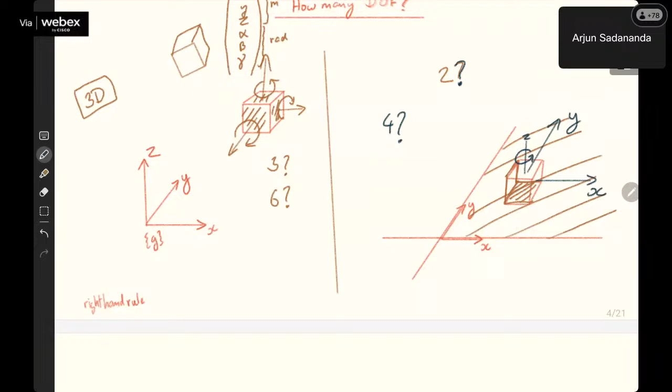So you can rotate in the Z axis, right? You can rotate in the z-axis - you can't move along the z-axis, but you can rotate this body along the z-axis. That is possible without leaving the surface. So it has only three: you can't translate in the z-axis, this is not possible, but you can rotate about the z-axis. You can't rotate about the x-axis either, because then the body would have to leave the surface - this surface contact would be gone. You can't do that in the y-axis either, but you can do that in the z-axis without leaving the surface.

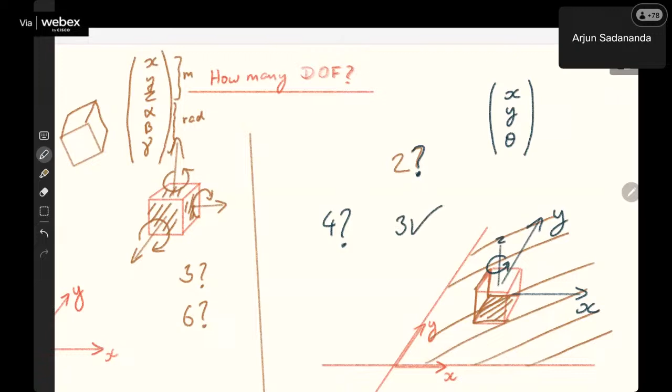So how many variables do I need to uniquely define the position of this object? I need an x and a y and a theta - three variables, right? So given these three variables, I can uniquely tell the position of this object in the two-dimensional plane.

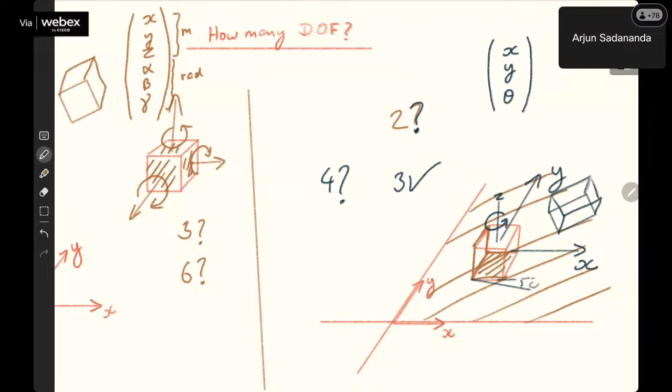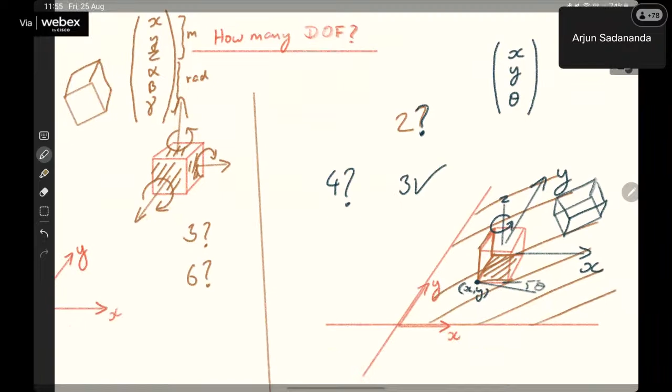For example, I can define it like this - it's not exactly tilted, but I'll force it to be a little tilted. Theta is the amount of tilt, and x and y is the exact position of this corner. So x and y is the position of this corner of the cube, and theta is the angle between this edge and the zero, which is basically the x-axis. I just translate the x-axis and the angle.

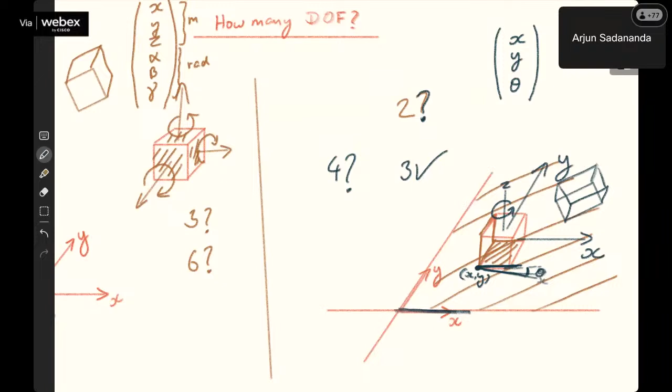So yeah, these three variables, corner position and this theta, are enough to explain the exact orientation of the entire rigid body. It is a rigid body is the point here. So if I just tell you the position of this edge and this corner, you can tell me the rest of the body's orientation and position, right? So that is how we do.

I mean, the problem of localization in robotics, localization is another keyword that we are not discussing today. When I said sense, think, act, that is from here, the sense part. But the problem of localization is exactly to figure out what is x, what is y, and what is theta at any given time. If you can tell me what is x, y, and theta, then you have solved the problem of where is my robot.

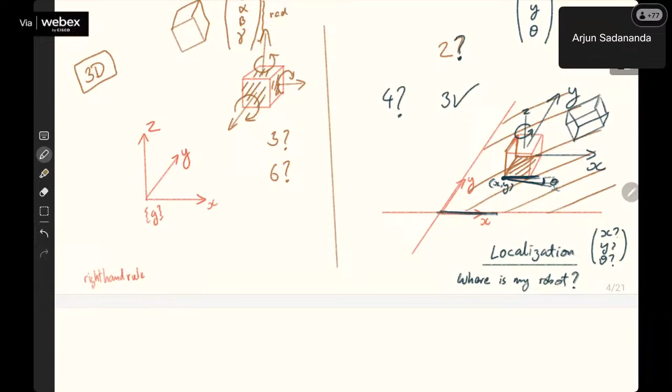So for those who are new in the field of robotics, this word should now make sense to you. Whenever someone says localization, this is kind of what the problem is. What is the x, y, and theta? This is like the systematic way to define the problem of localization, I guess. Of course, you can get into greater detail, but yeah.

With respect to a frame, there is a frame that is stationary. That I should, of course, mention. There's the global frame. I'm representing it with curly brackets. The global frame, G, and there's a local frame, which is defined by this edge, and I'll call it B, bot. Instead of a box, if I had a bot there, then that bot has a frame and there's a global frame. The relationship between these two frames is what localization answers.

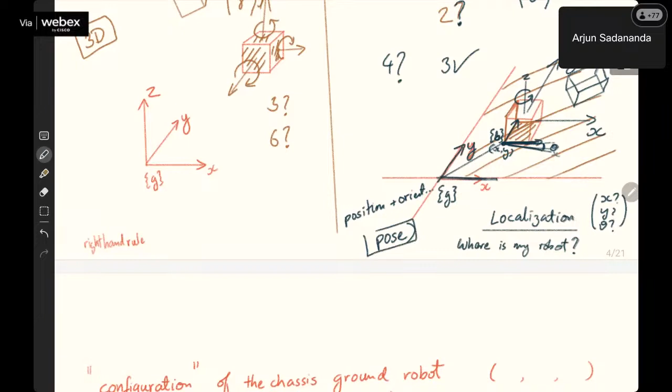And it's important to understand that the position of the robot, pose of the robot is another word. Pose. Pose is what? Position and orientation. Position and orientation of this robot is defined by something called the pose of the robot, and that's what is defined here. The pose of the robot is defined using x, y, and theta. Cool. So once we have that clear, now comes more interesting problems.

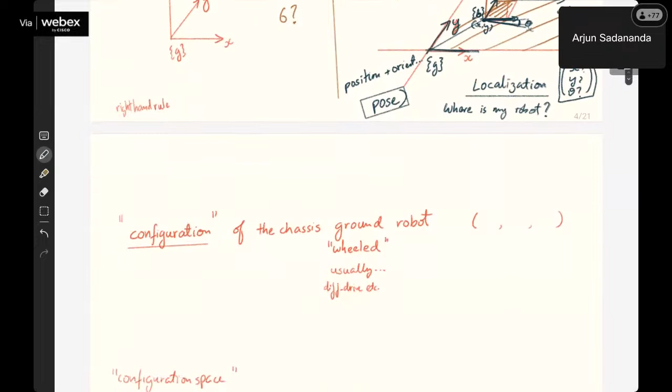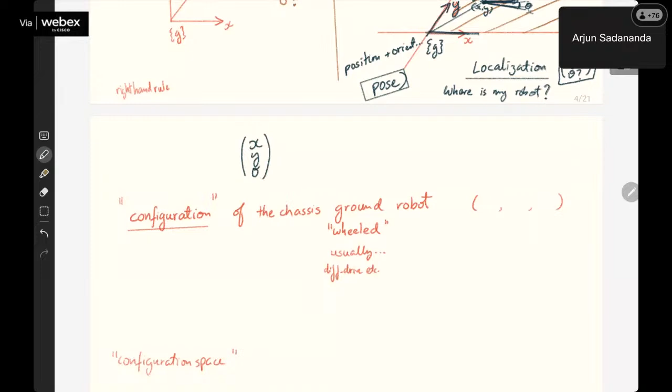Anyway, there is another word, fancier word, configuration, which also means that only. I can define the configuration of the robot using x, y, and theta. There's something called a configuration space, which in some cases would be a vector space, or at least we try to have a vector space. And this is why you need to study linear algebra in colleges or wherever you study linear algebra. Because linear algebra is trying to understand a vector space and its behaviors and how it transforms and all of that. So yeah.

Cool. Now let's talk about some constraints. Any questions so far? I don't think so. I think it was quite easy, right? I hope it was quite easy. And we just learned a bunch of vocabulary, that's all. So vocabulary and some basics is all we did so far. So let's move on to constraints.

Of course, robots in the real world have constraints. It's not like if I had a surface and just a block and that block is moving freely to do whatever. That is not what a robot is, right? If a robot has two wheels, you can't slide the robot in this direction. Intuitively, it makes sense. I mean, you would have realized that by now.

Or if you had a car that has Ackermann steering, can you do parallel parking by just simply pushing the car this direction? You can't. It has some kind of constraints that don't allow it to simply move in this direction. You can't apply a force in this direction. You can do something like that and come back and park. This is a very interesting point that I'll bring up again in a couple of minutes. But these are what we call constraints. It stops the robot from doing a few things.

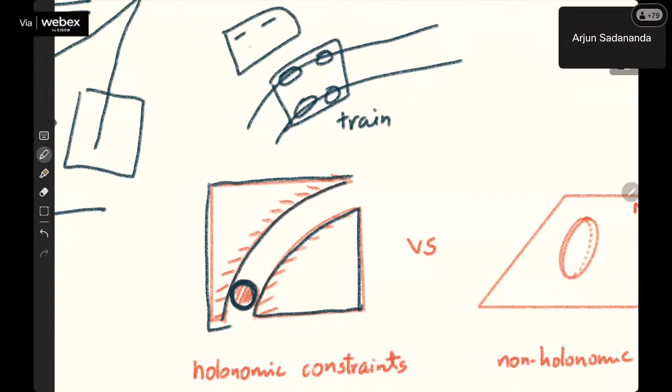This cartoon train won't get out of this rail, right? The train can never reach this position. This X, Y, and theta it can never achieve. No matter what controls you do, you'll not be able to achieve this. You can, of course, achieve this particular X, Y, and theta.

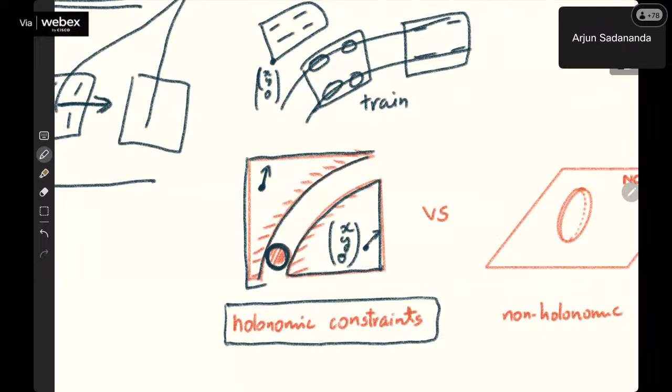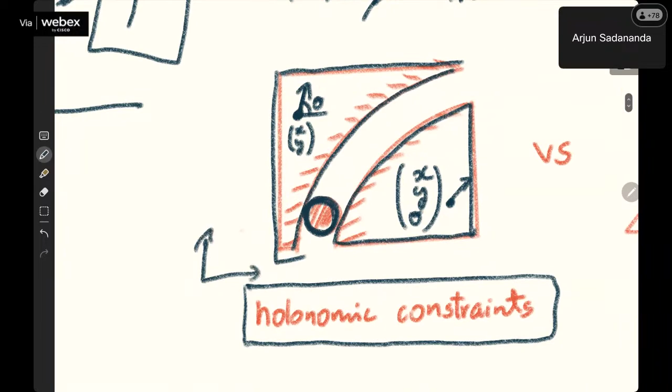These kind of constraints are what are called holonomic constraints, where you're not allowed to explore the entire x, y, and theta. This particular x, y, and theta, you're not allowed to explore. I can represent x, y, and theta with a point and an arrow, right? That's what I'm doing here. So the point represents the x, y, and the angle with respect to whatever global frame you have decided is the theta. So this particular x, y, theta is impossible.

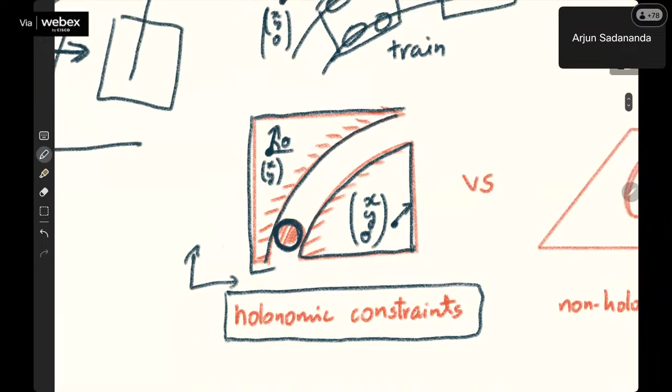This particular x, y, theta is impossible. You just cannot do it because of the way the system is decided. These kind of constraints on the system is what we call holonomic constraints. The word holonomic drive, do not mix it up with this. It is actually kind of ulta. Holonomic drive does not have non-holonomic constraints is what it means, funnily enough. In fact, it doesn't even have holonomic constraints. It might have holonomic constraints if you put a cage around which you can't leave or something like that. But this is the adjective for constraint type. Cool.

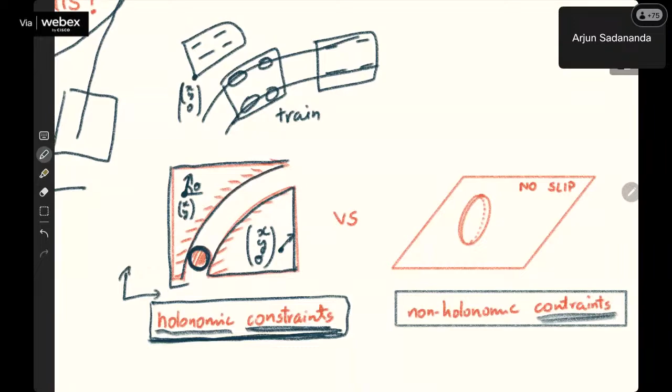Non-holonomic constraint is what then? Does anyone have a guess? It is a type of constraint. There's some constraint on the system, but what? What kind of constraint? Well, of course, it's a little complex question. I'll answer this right away because answering that in the chat would be a difficult job. So this is a rolling coin. I hope the visualization is clear, which is pointing in that direction, and it can roll like that.

This rolling coin is not allowed to slide like that. This is not allowed. The rule that it cannot slide like this is a constraint, right? It is some kind of constraint. There's a rule that is imposed on this rolling coin. So this is a constraint, but can this rolling coin achieve any particular x and y that I wanted to achieve? This particular position, can it achieve? Yes or no in the chat?

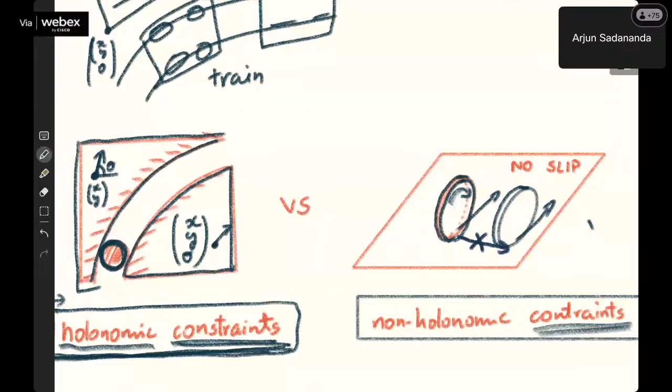Can the rolling coin eventually somehow, it cannot slide like this. It is not allowed to come here directly. But can it come here somehow using some other means? No? What does YouTube think? The rule says that the coin is not allowed to slide in this direction. But I want it to eventually come somewhere here, in this direction. This is new position and this is old position. Is it possible? Yes or no? No, no. Two people say no.

Of course, what is allowed is you can roll the coin in this direction. You can also rotate the coin about this axis. There is a vertical axis, right, on which the coin is, and you're allowed to rotate in this axis. You can roll the coin in this axis, which is the rolling action, usually however coins roll. And you can also rotate the coin in the perpendicular axis, perpendicular to the ground. Now, can you achieve this particular position and orientation that I wanted to achieve eventually?

Yes, so in YouTube they say yes. And okay, Kishore also says yes. Of course it is possible. How is it possible? You just rotate the coin, face it this way, and then roll this way, and then rotate it back this way. Just like a coin. You take a coin and do it. It's possible, right? Without slipping in this direction, you'll be able to go in this direction by just rotating the entire thing. So what kind of constraint is this?

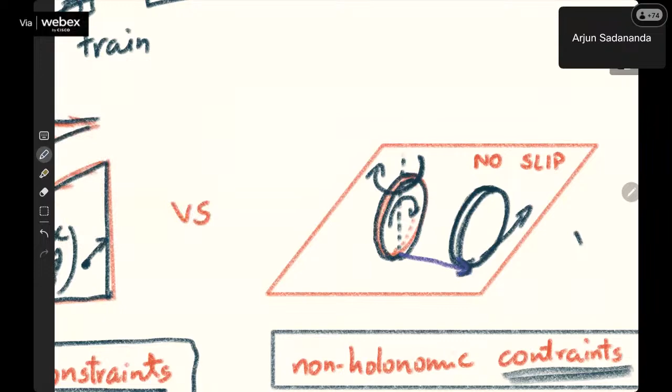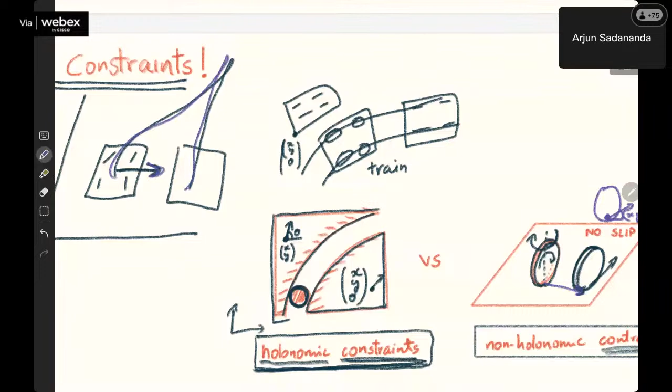It is allowed to go anywhere. I can achieve any particular position x, y, and theta. Any x, y, and theta this coin can achieve. But it cannot achieve it freely however it wants. It will have to rotate and roll and all of that. So a car, for example, can do parallel parking. It's not impossible, but it cannot do it directly. You can't just go like that. You'll have to do some more complicated maneuvers. So that is what is called a non-holonomic constraint.

So constraints are of two types like that. I hope that's clear. This is actually probably an unnecessarily complicated topic introduced too early on. But it's intuitive enough, so I might as well introduce it.

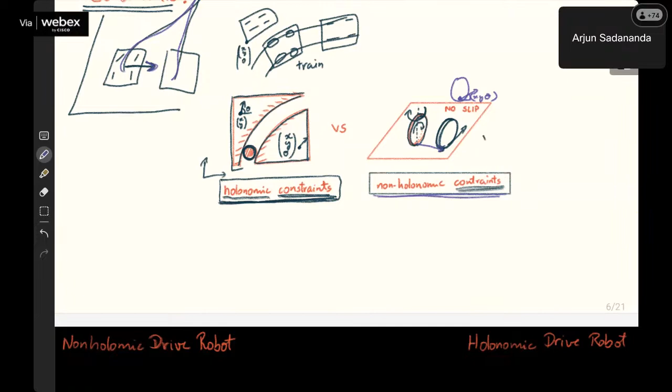Because we may not need this. I'm just describing these two kinds of constraints, that they have a name also. The constraints make sense, so I just give it a name. I mean, the name was given, I'm telling you the name, that's all.

So here are two robots that I have. One of them is a non-holonomic drive robot, and the other one is a holonomic drive robot. Here it's somewhat difficult to relate it with this non-holonomic constraint and holonomic constraint. But what this robot has is a non-holonomic constraint because it cannot slide in this direction. It cannot slide in this direction.

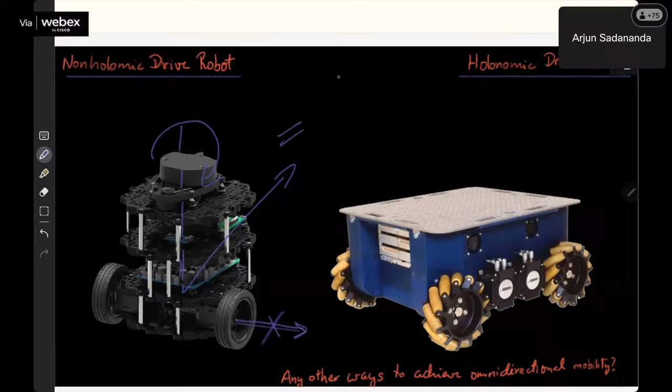It can go forward in this direction, and it can also pivot in the vertical axis. It can also achieve this motion, but it cannot slide in this motion. So this is almost equivalent to the rolling coin that we discussed earlier. In many ways, this is equal to the rolling coin. It's also sometimes called the unicycle model.

We will discuss this also very soon. Because a unicycle also is this, no? It is just one wheel with a pedal attached and a seat over here. So this is a unicycle or a rolling coin.

While on the right is a very interesting looking robot with very fancy looking wheels, which are known as mecanum wheels. And that is the kind of robot that we will be using in our theme. Not exactly this. Here we are using mecanum wheels. In our theme, we will use what is known as Omni-wheels. So Omni-wheels can be made in 3-wheel configuration as well. This is a 4-wheel configuration.

You can see there are 4 wheels with fancy looking rollers kept at a very absurd angle of 45 degrees. There are other rollers that you will see not in this presentation, but if you Google search Omni-wheel, you will see a wheel with rollers in the perpendicular direction. Instead of rolling in 45 degrees, they'll roll in this axis, something like that.

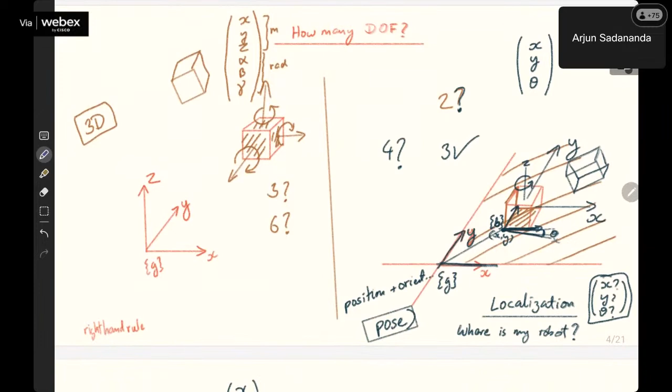Cool. This allows for what? It can do translation in X, it can translate in Y, it can rotate with omega. All 3 degrees of freedom that were possible for a body on a plane, we discussed here, right? This body in the plane case. It had 3 degrees of freedom. It could translate in X, it could translate in Y, and it could rotate in Z. In other words, I could also write Vx, Vy, and omega.

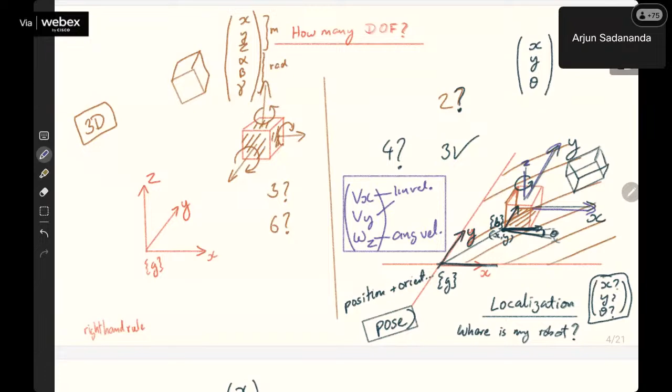It can have a linear velocity in X and Y, and an angular velocity in the Z axis. If you want, you can put omega Z. This is another way to just say that it has 3 degrees of freedom, right? It can translate in X and Y linearly, and it can rotate in the vertical axis with angular velocity omega Z. So this can achieve all of the 3.

It can achieve Vy, it can achieve Vx in the perpendicular direction, and it can achieve omega Z. How it does that is what we'll discuss next, and that is the topic of kinematics.

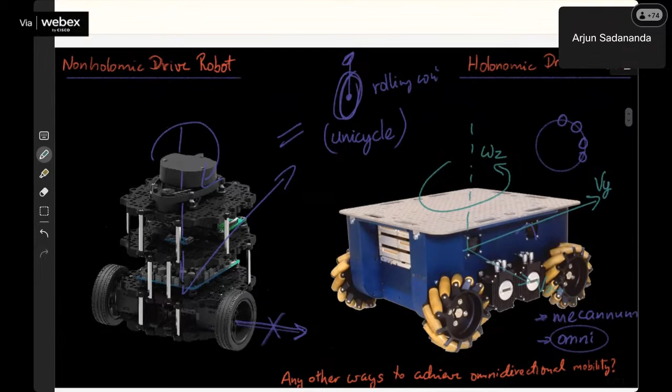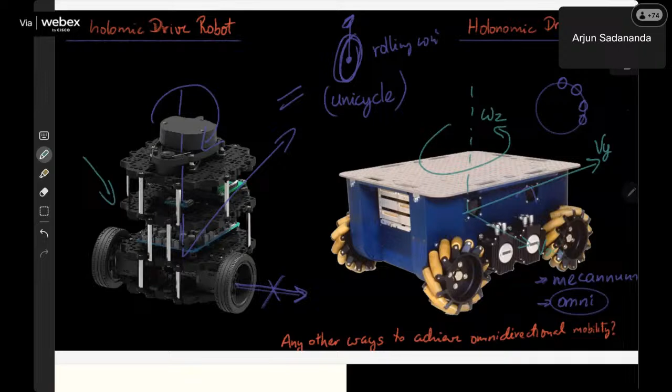But before we get to this hologlyph bot theme, let's look at something more basic. I think this is something that we are more familiar with, right? Just put 2 wheels on a motor and you have a robot. Quite simple. So let's discuss that first. There's a fancy name for that, of course. It's called differential drive because you have 2 wheels that can be independently controlled in 2 different directions. And we'll discuss that particular body's forward and inverse kinematics.

So, kinematics, first of all, what is kinematics? You might have also heard of something called dynamics. You might have also heard of something called kinetics. And what I'm talking about today is kinematics. What are these words? So, there is mass, there are forces, there are torques that are required to actually make this bot move, right?

Based on all of that Newton stuff and F equal to ma and the angular corresponding to that, inertia matrix and M equal to I omega dot, whatever that is called, alpha. Anyway, so you have all the linear and angular force equations, right? F equal to ma kind of equations. All of that comes in dynamics.

What we are not interested in with kinematics: we don't care about the mass of the bot. We don't care about how much force is required to actually push this wheel and achieve a certain velocity. We don't care about the torque required for this motor. There are motors attached to this, right? We don't care about that.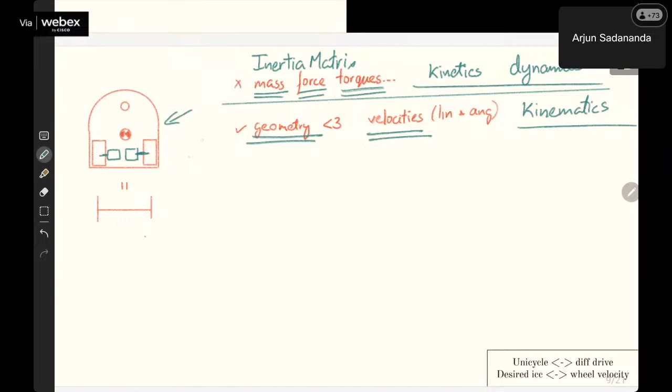So today, what is our picture of this differential drive robot? I have a differential drive robot here, a generic one that has a chassis. It has a caster wheel, if you know what that is. It has motors. It has a wheel of certain width and radius and all that. And it has a certain shape, whatever complex shape it has. For us today, it is equal to this. This picture over here and this picture over here are the same for us.

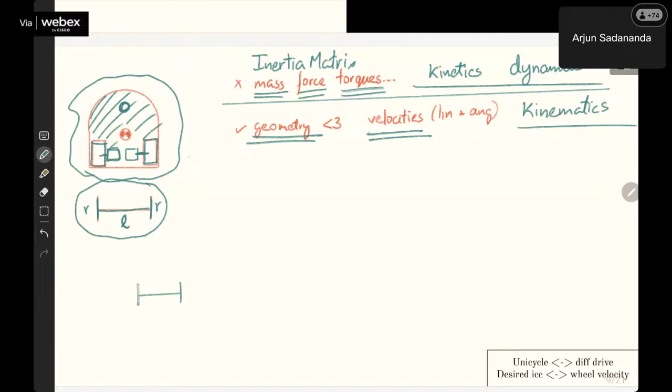They are the same. The only numbers I care about are the radius of the wheel and the length of the axle. This is the only thing I need to know. I don't need to know where the caster wheel is. I don't need to know where the center of mass is for discussing kinematics. Cool. So from now on, our differential drive robot is just that. This is my differential drive robot, completely defined. Okay, we shall see why.

Because now the question that I'm going to ask is, what kind of motions can I achieve with this particular bot? How do I start? So I'll actually simplify this further. There's a layer beyond this as well. I could in fact remove even the R and just call it that. How do I do that? Actually, the wheel has an angular velocity, let's call it phi R, and this has phi L.

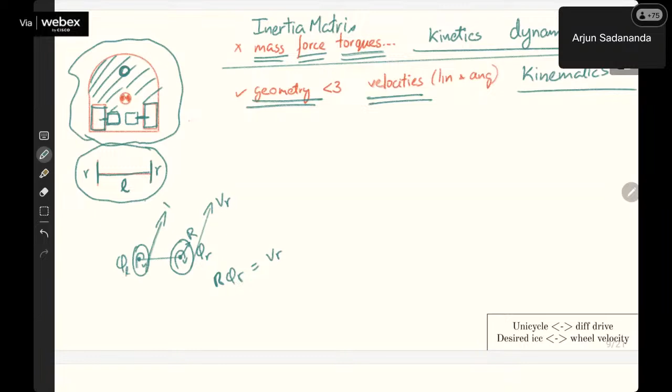Then there is the radius. So R times phi R, the radius of the wheel, is basically VR, is what I'm going to call it, which is the linear velocity of this wheel at that instant. And this particular wheel will have VL, and VL is just basically R times phi L. What is phi L? It is radians per second of the wheel. This is just meters or mm or centimeters, whatever. This is in mm per second or meter per second or whatever.

Right? So this picture I am going to neglect and I'm going to further simplify this model to just 2 points separated by a distance of L. So even the radius of the wheel won't be of concern for me, because now what I'm going to work with is left wheel velocity and right wheel velocity. Cool. So the velocity of this robot, what can it achieve? I can achieve any particular left wheel and right wheel velocity by giving the command to this motor. So eventually, once I have decided this, I will calculate whatever RPM is needed and give it to this motor, respectively for left and right. So this is my differential drive robot now.

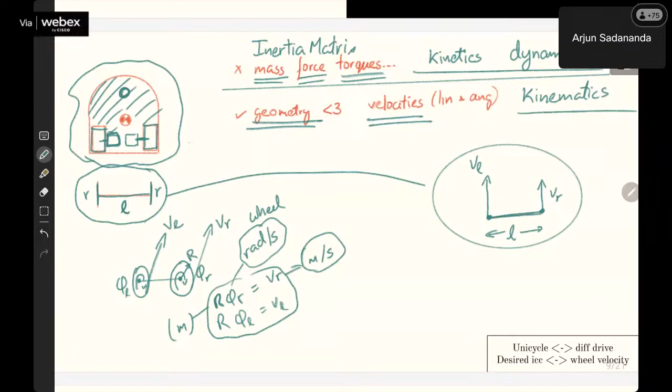Anyway, so continuing on, this is my robot, and now I'm asking the question of, let me draw that robot here. I can achieve forward and reverse velocities. My question is, how will the robot move if I keep a constant velocity? Let's say this velocity. I give it this velocity. And the magnitude of this arrow is the magnitude of the velocity. Given that, can you tell me how this robot will move? Will it go left, right, straight? What kind of trajectory will it follow?

It'll go right, okay, it'll go right. But how exactly will it go right? Can you give a more precise answer? What is the complete trajectory? I'm not going to change the velocity.

If I observe this for, exactly. So it's going to be a circle, right? I could have asked one of you to come to the board and draw this, because now the next question is, what is the circle that it will trace? I can geometrically show you exactly the dimensions of the circle, exactly the shape that circle will be. It will be a circle. It could be a circle like that. It could be a circle like that. So many circles exist, right, of different radii, and so the circle is going to be

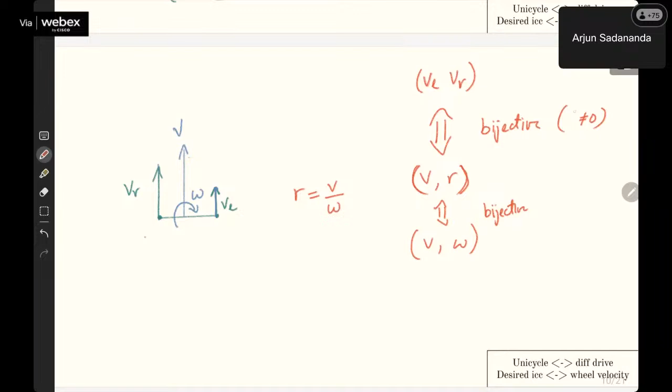Now this is the interesting point. I could equivalently, this is the key point, very important point, I could equivalently say VL, VR. There's a big difference. To get from here to here, it was quite easy, right? You just divide V by omega and you get R. So these two is a one-to-one relationship: for every V and omega, there is a unique V and R, also called bijective mapping. This is also a bijective mapping as long as L is non-zero, to be very precise. Just to be clear, the length, not left, the capital L I will use. The capital L is this.

As long as the bot has some size, it is a bijective relationship between V and radius or V and omega. I prefer to talk about V and omega. So V and omega and VL and VR. And this particular mapping, this bijective map, is what is forward and inverse kinematics, depending on which arrow you're pointing towards, FK and IK. One direction is forward, the other direction is inverse. So which one is easier to work with for a human being? Here is a question. For a human being, which model would you prefer?

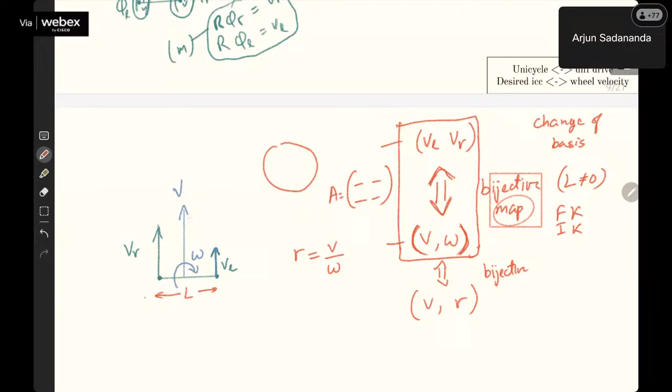So what did I say when I said it's a bijective map? If you know this, you know this. If you know that, you know this. There is literally no new information. It's just a change of language. You just said the same sentence in English or Hindi or any other language for that matter. The meaning of that sentence is the same. These two are literally the same thing. You just change the basis. So if you want the technical term, it is a change of basis, a linear algebra term. And what is actually happening is a transformation. Some matrix defines that transformation. We will define that matrix as well.

So is that clear? I asked a question. As a human being, which one would you prefer? These are equivalent, right? I could describe the robot's motion using left wheel, right wheel velocities. I could describe the robot motion using the bot's linear and angular velocity. As a human being, which one would you prefer? And as a robot, which one would you prefer? As a human being, which one first?

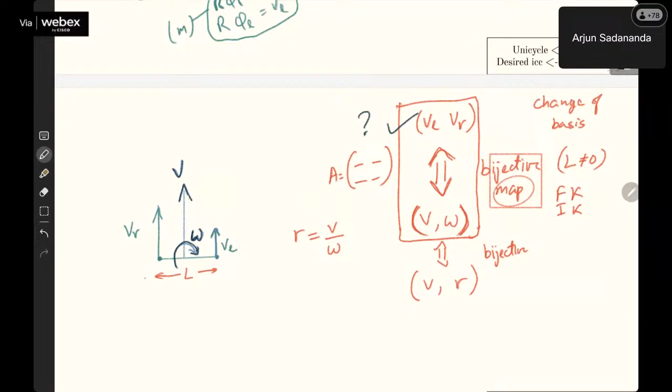If V is greater than 0 and omega equals 0, it's immediately clear that the bot will go straight if it starts here. If V equals 0 and omega is greater than 0, it's immediately clear that this robot will spin on its own spot, because it's not going to go straight at all. Zero linear velocity, full angular velocity.

If I say V equal to 1, omega equal to 1, then you know it will make this circle. And if I say V equal to 1, omega equal to 2, and the robot started here, it implemented this circle. Intuitively, it makes sense. So you know exactly what it will do given these two numbers, very intuitively.

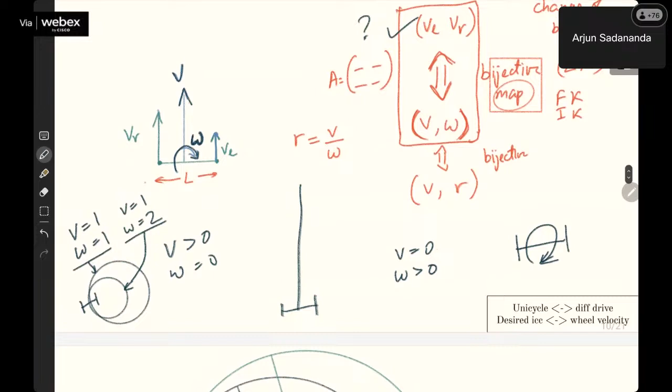But if I give you left wheel and right wheel, you will have to eventually convert it to V and omega and then think in those terms. But what does the robot need? It needs VL, VR. That is the world the robot lives in, the robot doesn't understand V and omega.

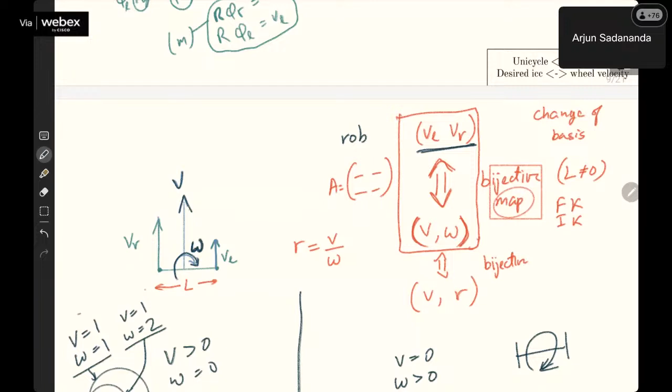This is the robot's world, and this is the human world, or more precisely the control world. We like to implement control systems on this rather than that, because control systems are very difficult to implement at the motor level directly. It's easier to control V and omega, because we'll say go this fast in the forward direction and slowly turn in this direction. I don't want to say increase this one this much and decrease this one this much and then adjust - that is too difficult to explain. So that's why we need this mapping: going from the human world to the robot world is inverse kinematics, and coming from here to here is forward kinematics.

Cool, so let's move on and take some. I have a picture of the same thing, and now the mathematical definition of the same: omega is the difference divided by L.

So the more the difference, the greater the omega will be, which should make sense. If the difference is larger, the steeper the angle will be - if this wheel is at that angle and this wheel is at this angle, the angle is steep. If the difference is smaller, the angle is smaller. So this angle basically represents omega in some sense.

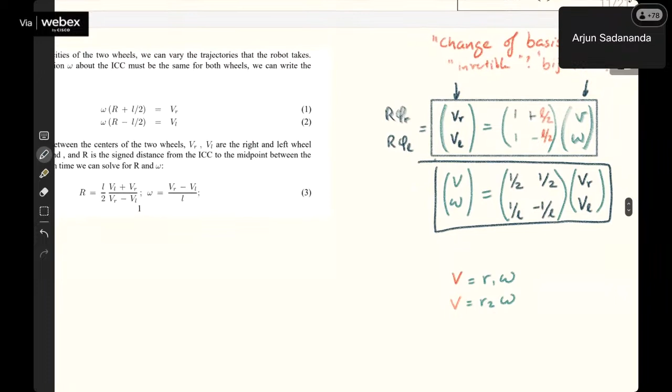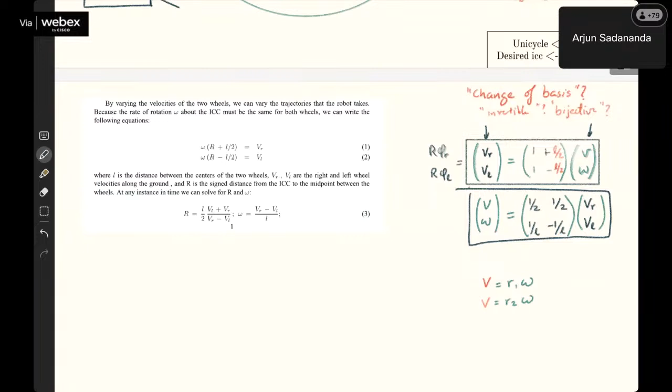Does it make sense? We applied kinematics to a very different kind of system. In your coursework, you would have applied kinematics to serial linkages - a robotic arm, where you answer the question of where is this point, the x, y, theta, or x, y, z, alpha, beta, gamma. Because if you have six links, arranged properly with joints properly, you should be able to control all six variables to some extent.

So the question of what is this, and then actually what you have is theta 1, theta 2, theta 3, theta 4, and so on.

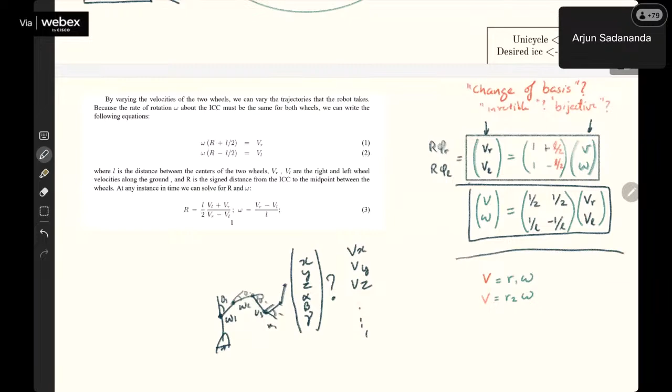You could change that question also to omega 1, omega 2, omega 3, omega 4, the angular velocity of each of these links, and Vx, Vy, omega, Vz, and some angular velocities respectively. This question is what we did here for the ground vehicle. I would urge you to go and think about this further if it is not already clear. But this should be quite simple. This is a simpler system to work with, so it should be easier to understand. And of course, as I said, it's a change of basis. So if you want to think of it from a mathematician's perspective, then all of these terms is what also gets introduced.

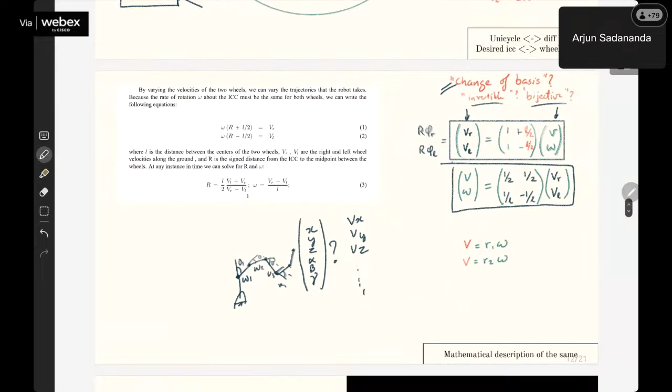Okay, I think it's high time the hologlyph theme comes into picture, and that is basically the holonomic drive robot. I think I will give away the answers a little more easily now because anyway, if you are more interested in this, I would urge you to register for the competition and put hologlyph theme as your preference. Then you might end up in the theme, and we'll explain all of this further.

Okay, there is one question. So, okay, I'll give you the answers now, and I'll give you the final. I'll give you my experience directly. I'll feed it to you. But the actual way to learn it is you do it and you experience it. So for now, I'm not going to ask questions. I'm just going to tell you what it is, and then you can think about it.

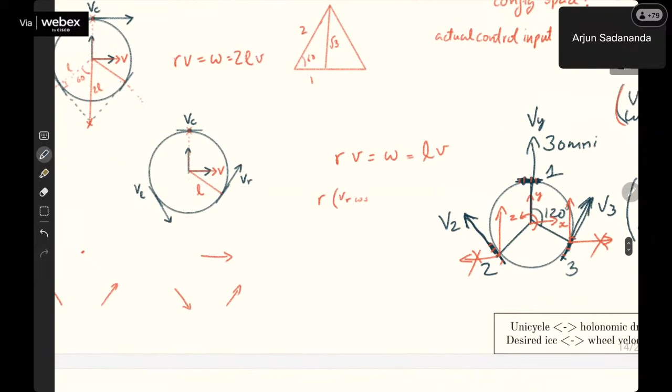Okay, there are some interesting situations that can happen. So if you had this combination on the bottom right, if you had one wheel pushing like this, one wheel pushing like this, then you just have to do the vector sum. You do the vector sum by taking components, for example, and adding all the components in x-axis together and y-axis together. When you do that, you will find that this and this cancels out, and eventually the robot moves in this direction. As we discussed, components you take, this and this cancels out, and the robot moves in this direction.

Here is an interesting one. If I simply do this, it does move in this direction. That is, and this is all zero, right? So the sum is just this. But we are only discussing V so far, which is basically you can split it again into Vx, Vy. So if your complete velocity is like that, you can resolve it into Vx, Vy.

But we did not discuss omega, which is omega z. That omega is quite curious. Okay, right. Anyway, so there is an omega as well, and the omega will basically make the robot rotate. Oh, I have a lot of things to show, I just realized. It will rotate about this basically. The robot will go like that. So this is probably more understood when you see it, but I will just - 1 second, give me a second.

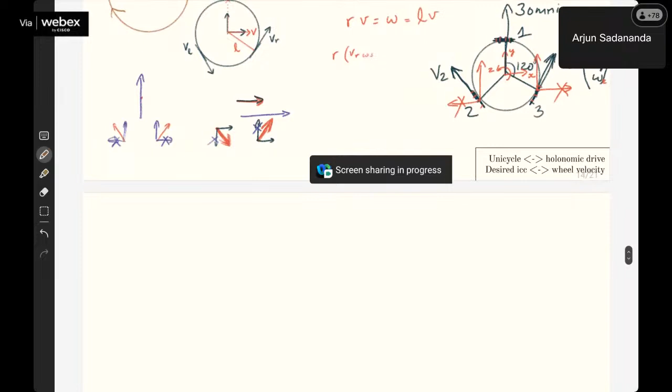Okay, sorry, I had to adjust the quiz questions because the amount of topics covered is different from what I had planned.

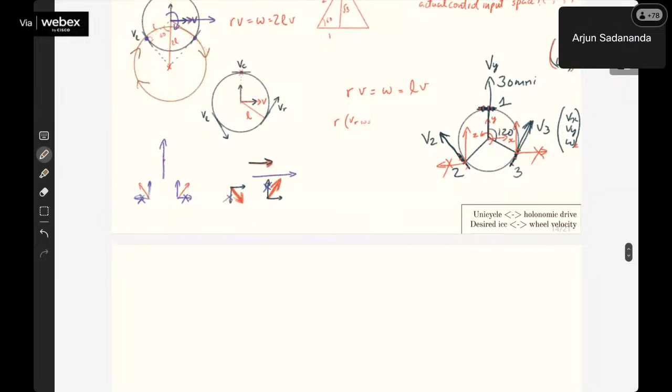Now, as I said, I am giving away the answers now. So there are three wheel velocities, S1, S2, S3. Remember the matrix, right? You had earlier a relationship between V and omega and VL, VR, the left wheel and right wheel velocities, linear and angular velocity of the entire chassis. This is the chassis velocity, and these are wheel velocities. Of course they are related. If you give a certain wheel velocity, it will produce a certain chassis velocity. And if you want a certain chassis velocity, there is a corresponding wheel velocity that will achieve that chassis velocity. I hope that much was clear.

So a similar problem is now done in holonomic drive, where I've written just x, y, and omega here, but it actually means Vx, Vy, and omega. So here the question is again the same thing: S1, S2, S3 are wheel velocities, and these are chassis velocities.

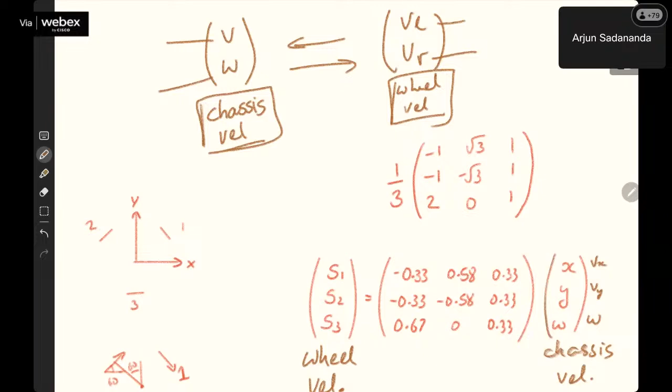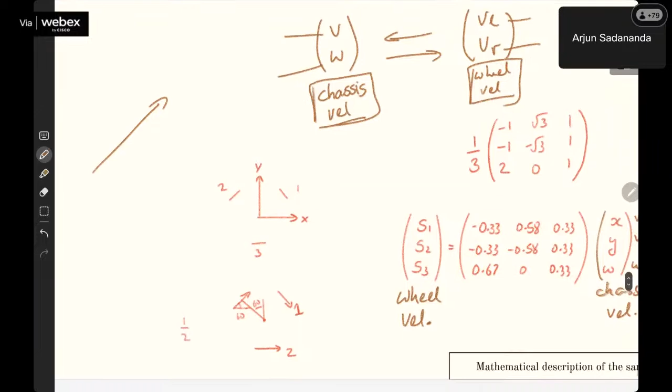Again, which one is easier for the human? Vx, Vy, omega, right? It's easy for me to tell, make the robot go in this direction while also rotating like this. It will achieve that. If I say just rotate, it will spin on the spot. If I say go in this direction, it will simply go in that direction. How do I do all this? This is V, I just resolve it into Vx and Vy, and I say go this much Vx, this much Vy, and this much angular velocity. That is my command. This is the high level command.

High level is more suitable for humans, right? Controls or high level commands. This is the low level stuff, because wheel velocities, especially now, it gets even more complicated. Three wheel velocities, this and this and this, if I do, it will move like this. That is a very difficult question to answer, right? For simple cases, it's easy.

If you have three wheel velocities like that, and if I want to go like this, if I give these velocities, which direction will it go? That's a question mark, you can't really tell. That relationship is not so obvious, and if the scale is weird, not symmetric, it won't cancel out.

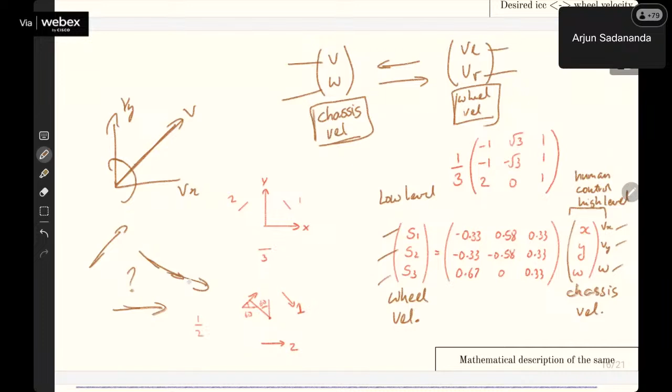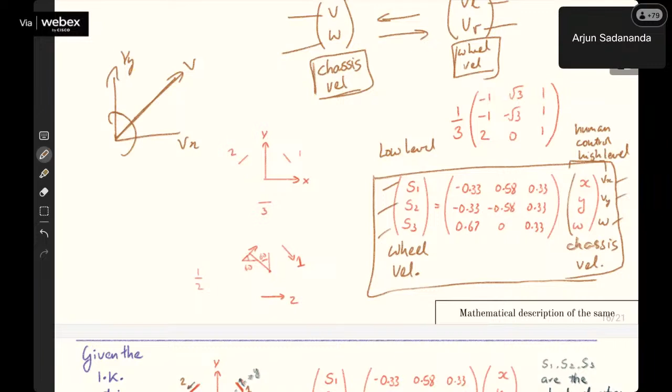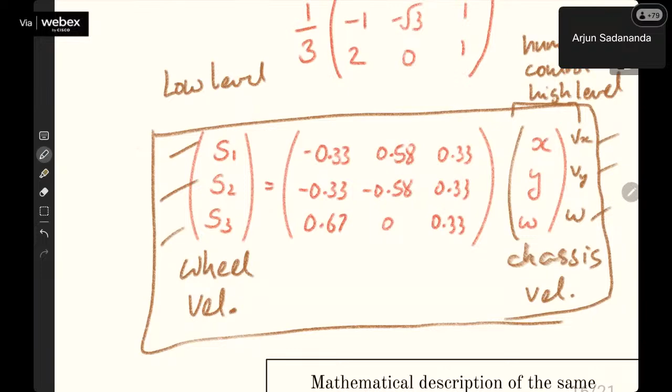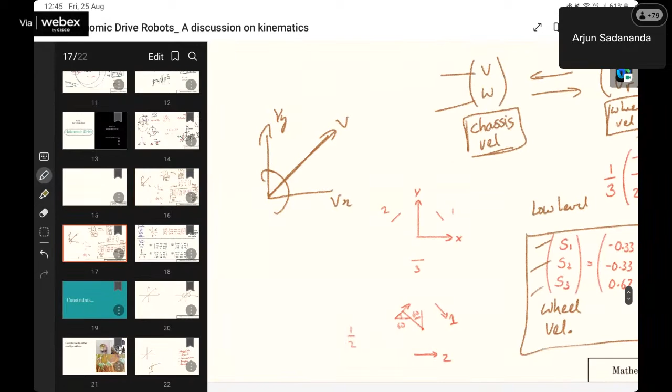So therefore you need a matrix like the one shown here on the right side. If you have this matrix, the job becomes very simple. Pay attention to this part because I have a quiz question also here. So what is, if I want to make the robot go in x-axis, I'll just copy this. So if I want the robot to go in x-axis only, what do I do?

What are my wheel velocities? This is my question: what are my wheel velocities if I want the robot to go in x-axis only? It's as simple as doing that. I want it to go in x-axis, I do not want it to move in y-axis, I do not want it to rotate. If I do the matrix multiplication, it's just this column here, this all gets cancelled out, and this particular vector comes out.

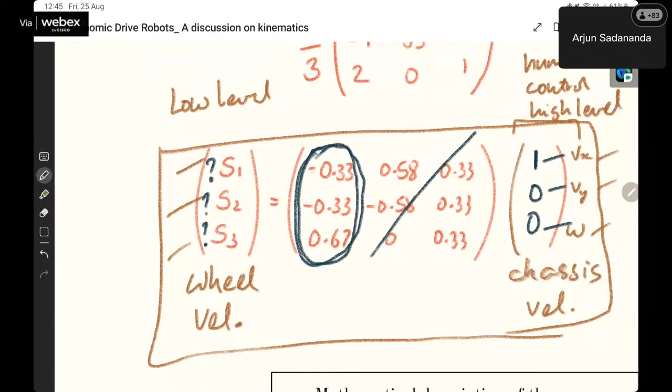And if you notice, there is a convention that you have to follow as well, shown here on the left hand side. You have to define what is the positive direction for each wheel. The arrow I just showed is the positive direction, which means if you get a positive S1 value, you should make the velocity go that way. If you get a negative value, then the other way, because positive is not so obvious here.

For differential drive it's obvious, positive is up and negative is down. But this is somewhat circular, so we keep all of them in clockwise direction. This is positive and this is negative, right? So if you notice, what is S1, what is S2, what is S3? It is minus, minus, some minus small value, and plus some double value. So how will I show that? If this is the positive direction, I'll use a different color and show you the actual velocities.

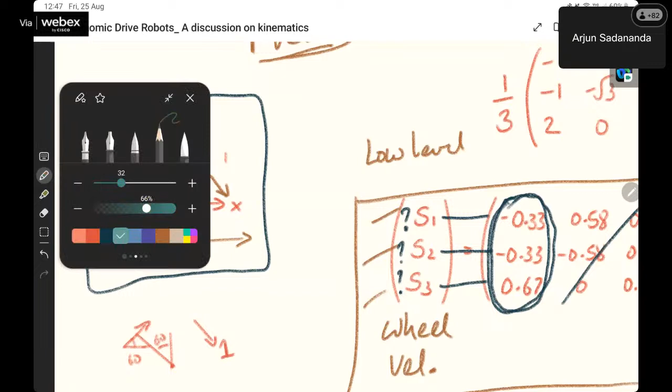S1 in minus direction, S2 in minus direction, S3 in plus direction, and double, right? That's what it is. So now if you again do the forward kinematics ulta just to understand, did you get the correct answer? Then you will notice that these two are correct answers. This cancels out. This and this is equal to this, and you don't get any rotation as well. And you translate equally in this direction.

So that is the cheat code that you have. In fact, if you copy this matrix down, you basically have a huge hint for task 2. This is usually left as an exercise for you to figure out what matrix this is. But anyway, I've given the answer here.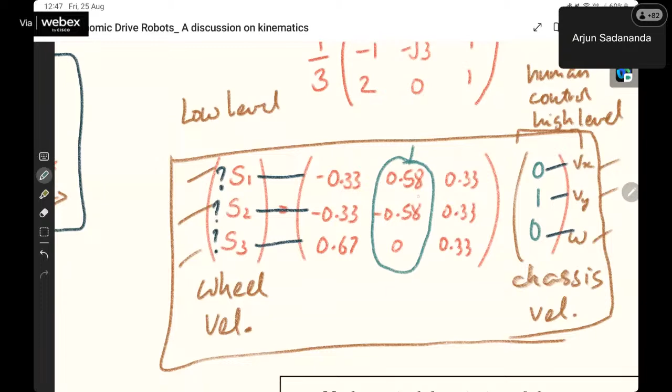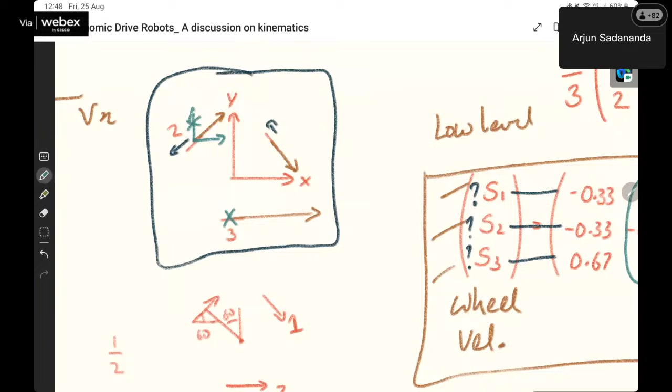So if you do 0, 1, 0, then this is the column that you will get. And you'll get to know that this velocity, this velocity, this velocity, if you give, it will go in the y-axis, which is basically saying that this should be 0 and third one should be 0, right? Third one should be 0. And first and second should be first positive, negative, second positive. So it pushes like this. Notice this vector.

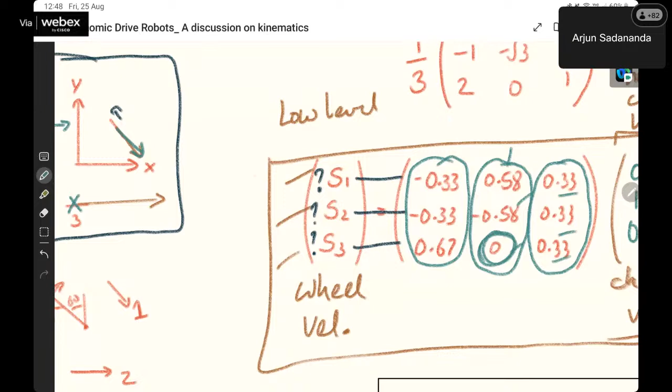So actually these three columns in the matrix are very interesting. If you give 0.3, 0.3, 0.3, what will happen? It will have only all positive direction, right? All positive direction. This must be very obvious. If you give this, then it's just going to rotate on the spot. It's very important that you visualize all of this. If you did not visualize all the things I'm saying, this would have been a very difficult job to understand what I said.

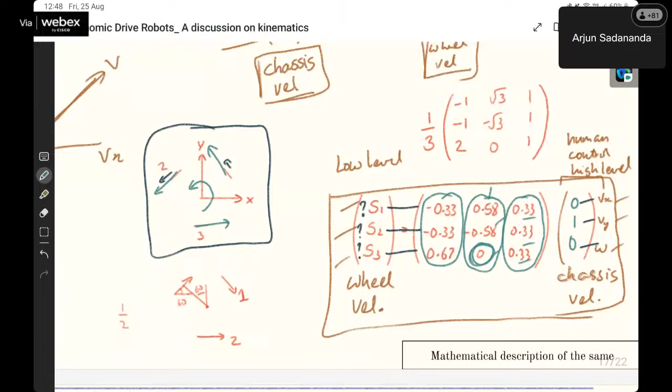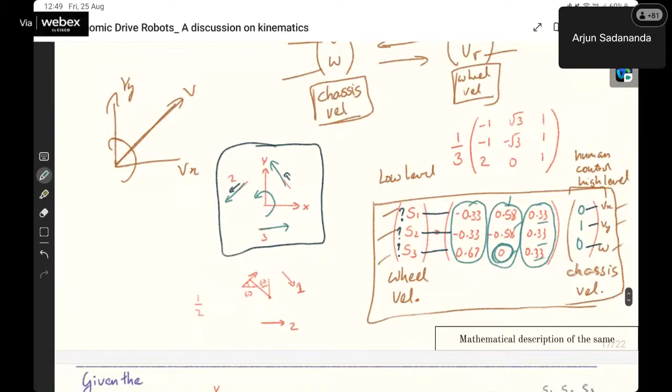So this is the quiz question for your hint, hint. Anyway, you can give it an attempt. But yeah, this is the basic understanding. If you give 0, 1, 0, 1, 0, 0 and 0, 0, 1, what happens as the output is always an interesting question to ask. You must check if it makes sense.

If you want it to go in Vx, what is the number you are getting after the calculation? Substitute those numbers in the actual robot. Put these numbers here and see if it will intuitively make sense. If I want to go in this direction, and if the matrix is giving that the values are this, of course it is wrong. You're saying wheel should go like this, but the chassis should go like this. That is impossible. It's ulta.

So probably the matrix is supposed to be all sign change, or maybe just this column has to become minus, right? Because the omega case is ulta. Instead of going in plus omega, it went in minus omega practically when you checked. So something was wrong in your matrix, which you came up with. Cool.

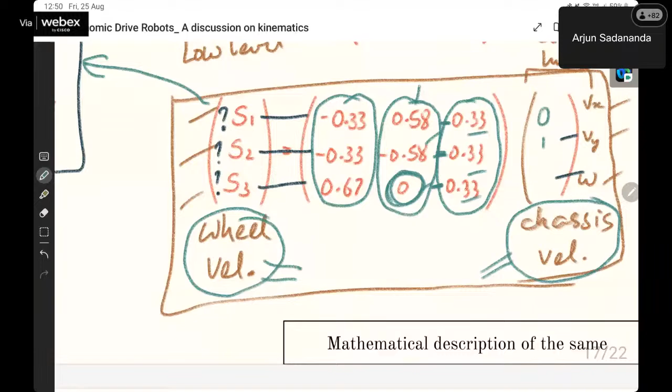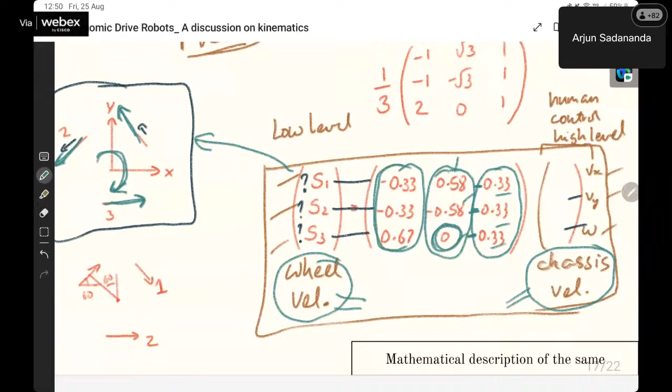So that is what we are doing. It's a linear transformation from the chassis velocity to the wheel velocities. This is the high level, easy to understand thing. This is the low level, what the robot needs. And how to test this is by substituting different kinds of standard vectors: 1 0 0, 0 1 0, and 0 0 1 are three things that you must always put and check if it makes sense, because that already says if these three columns make sense. Cool.

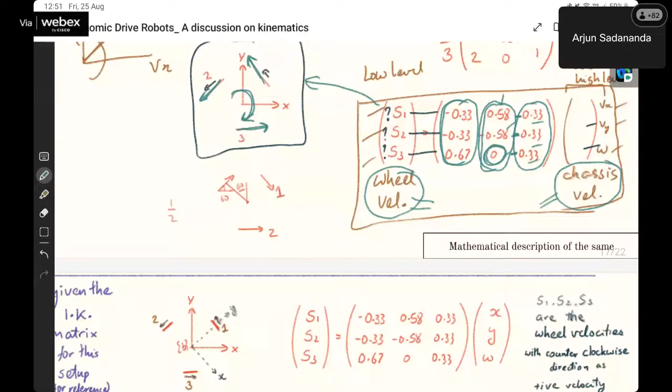There was this fancy topic of constraints that I will absolutely not touch on today. It's way too much for today's session. So if you are really curious about this, I would recommend one particular lecture series from Northwestern Robotics, and you can search for omni-directional something. If you search that on YouTube, you'll find an excellent series that I have not finished watching. These two videos that I have watched were excellent.

So if you, oh sorry, Northwestern omnidirectional, if you search, you shall see part one and part two. I would recommend you to explore this. Probably it's a little advanced. It's like generalizing to any holonomic drive robot. But if you have the patience, you should study this. It's probably not required for the theme, but it is required for your general mental well-being, probably, when you're working in this theme. So, okay then.

Again, the theme is here and I've finished the presentation. The references I've given. Some papers were of course referred, but it's fine. Now there's one thing that I wanted to show you that I just worked on last night. Another software that I strongly recommend everyone should explore, which is called Desmos.

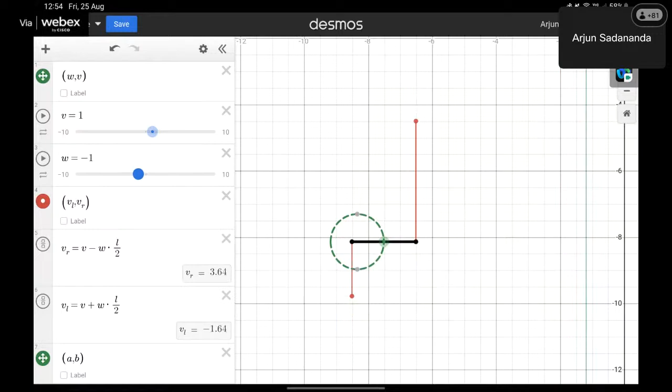If I steer to the right with a small linear velocity and high angular velocity, then the circle that it will trace is shown here. In fact, this is probably an interesting situation where the arrows are ulta and all of that, but I might need to check the exactness of this, but intuitively this is what it is. You can see the V and omega. In fact, you can see the R, and you can see the VL, VR in the red line.

But in fact, the linear algebra, if you have studied linear algebra, you would have seen. I would strongly recommend one more recommendation, 3Blue1Brown linear algebra series. He will show you an animation like the one I'm showing here for a different kind of system. But what I have here is left wheel and right wheel velocities in the red dot and V and omega in the green dot.

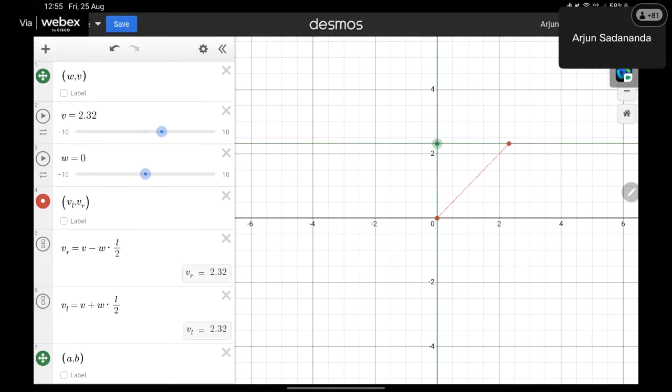If I steer to the left, it will turn left. If I steer to the right, it will turn right. If I give only linear velocity, then it will go straight. And the red dot clearly shows equal magnitude for both left and right. So there are two different graph plots with two different axes shown overlapped on top of each other. One of the graphs is V and omega, which is the green dot graph, and VL, VR is the other graph.

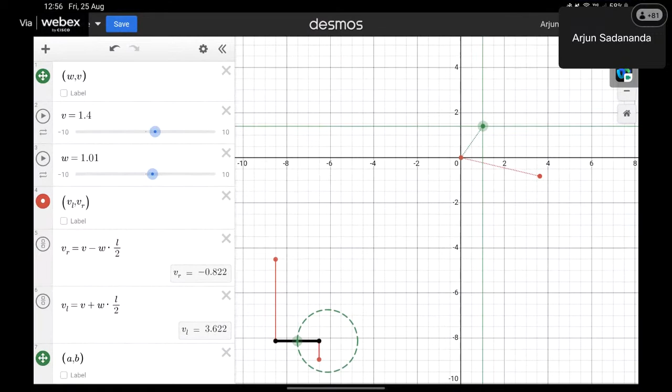And what is happening is that matrix that we discussed earlier, a 2 by 2 matrix, is doing the transformation from the green dot to the red dot. So if you're curious, you should study this and understand this at a deeper level. So that is Desmos for you, and I would recommend you explore Desmos as well.

So the key takeaways are, of course, all the technical stuff that we discussed. But apart from that, in general, linear algebra from 3Blue1Brown, you should explore if you have not already. And if you want advanced stuff, then I have already suggested this particular Northwestern University course. Desmos was the other thing that I suggested, Desmos for plotting and visualization, because I personally prefer visual learning. Maybe if you're not, then you don't care about Desmos. But if you are, then I would recommend Desmos.